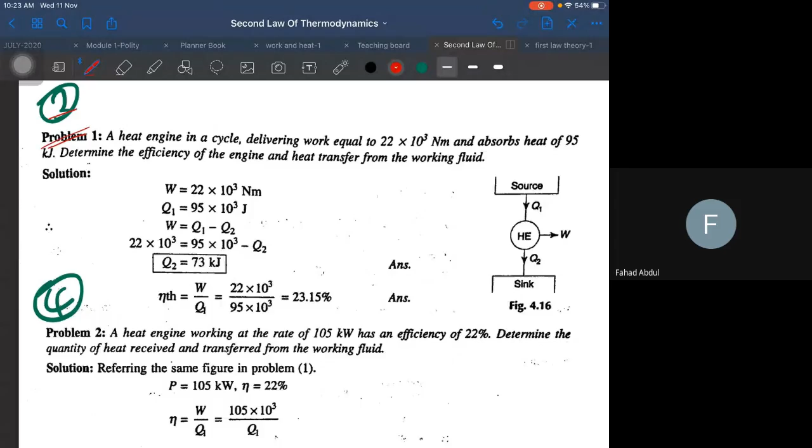Okay, so we shall start with second law of thermodynamics problems. We have solved a couple of them in the previous class. We'll try to look into some of them here also. So in this particular problem, which is the third problem I'm going to solve, a heat engine in a cycle - kindly concentrate, guys, concentrate in order to understand.

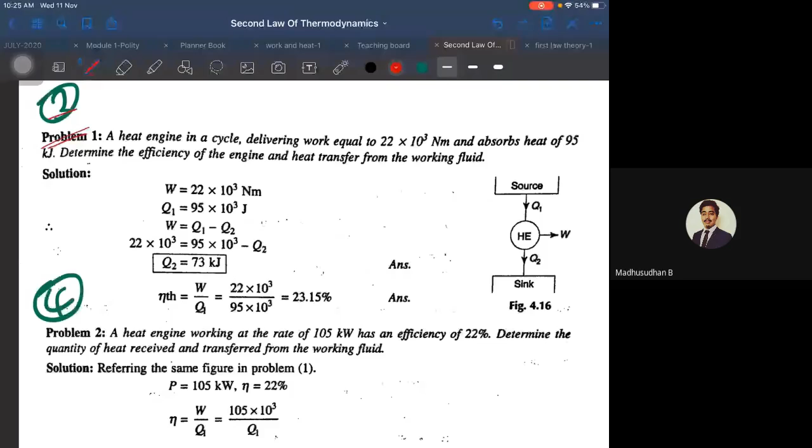So we were discussing a few problems. Third problem now, let us read the question. I may not be too interactive with you, but please do engage in the class. This is very important. Now understand the concepts, okay?

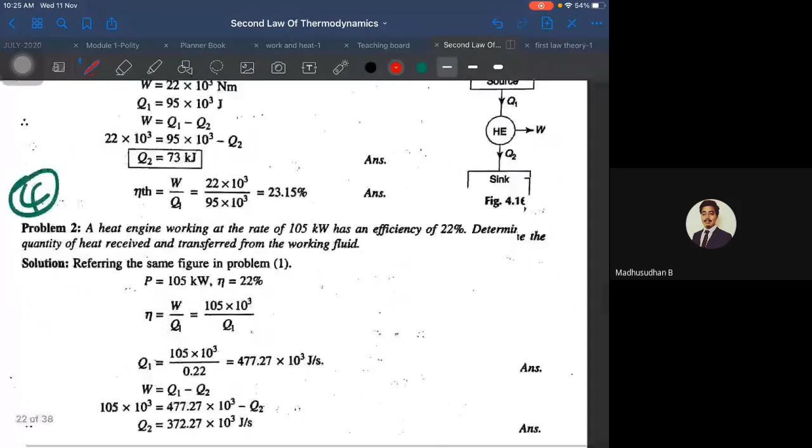A heat engine in a cycle delivers work equal to 22 into 10 to the power of 3 Newton meters. So I can write W equal to 22 into 10 to the power of 3 Newton meters, which is the work developed here. Next, it absorbs 95 kilojoules of heat.

With respect to sir, is it Q1 or Q2? It's a heat engine, so Q1. Q1 is given as 95 kilojoules of heat. Determine the efficiency of the heat engine.

So you have to find the heat transfer from the working fluid. As simple as that, okay.

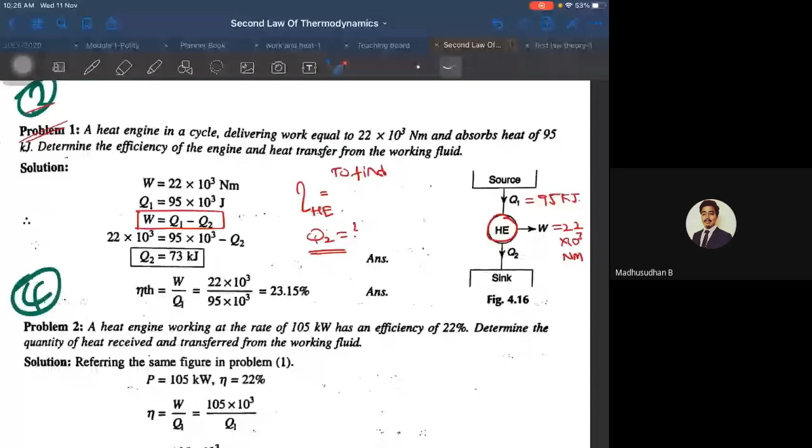So W is given by Q1 minus Q2. You know the value of W, and you know the value of Q1. You can calculate the value of Q2. So Q2 is equal to, as calculated, 73.

Now you have to calculate thermal efficiency. Thermal efficiency is the work output divided by the heat input, so W of the heat engine divided by Q1. Since W is given and Q1 is known, you can calculate thermal efficiency.

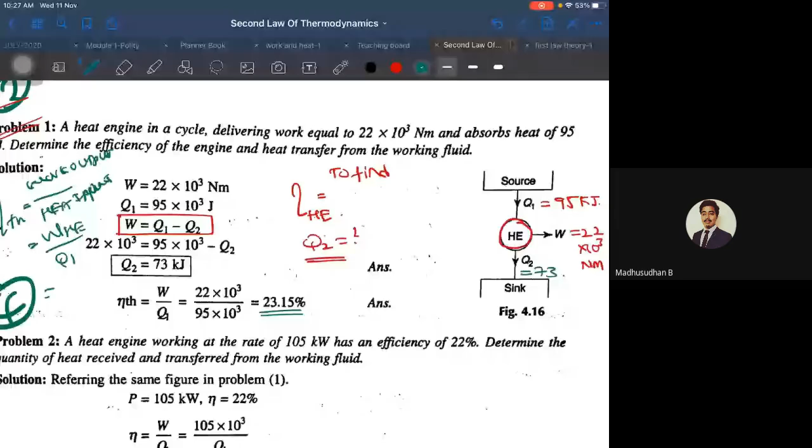So simple problem, any doubts in this? No, sir. Understood the problem? Yeah, okay, shall we move to the next one.

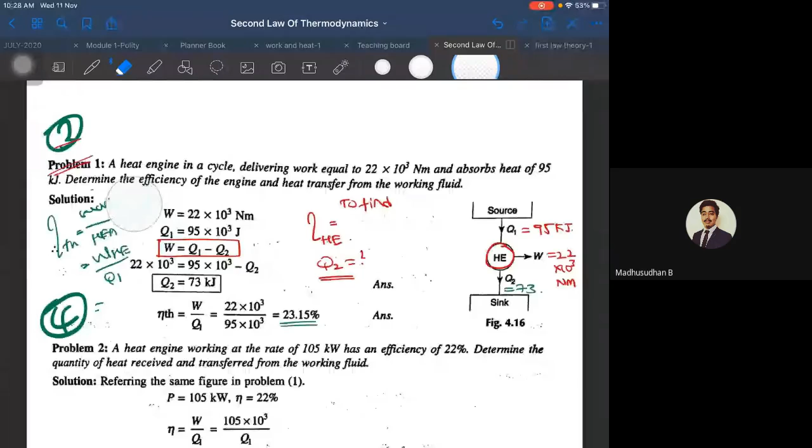A heat engine working at a rate of 105 kilowatt has an efficiency of 22%. Determine the quantity of heat received and transferred from the working fluid.

It is a heat engine, so first let me draw a heat engine. It receives heat from a temperature source, and there is a sink T2. So it receives Q1 amount of heat and ejects Q2 amount of heat. The difference between these two is given as the work output, that is Q1 minus Q2.

So what are the things given in this problem? Work output is given, which is 105 kilowatt, and efficiency is also given, which is 22%. You know that efficiency of a heat engine is the work output divided by the heat supplied.

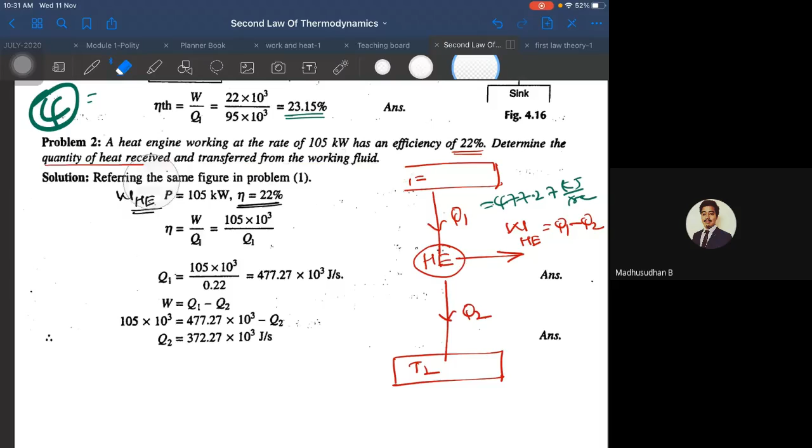Same thing, W equals Q1 minus Q2. W is known, Q1 is calculated, and you can calculate Q2. Thereby you get the quantity of heat received and transferred from the working fluid. Any doubts in this problem? No, sir. Kindly concentrate, and in the meantime, if you feel bored or stressed, just give me a sign.

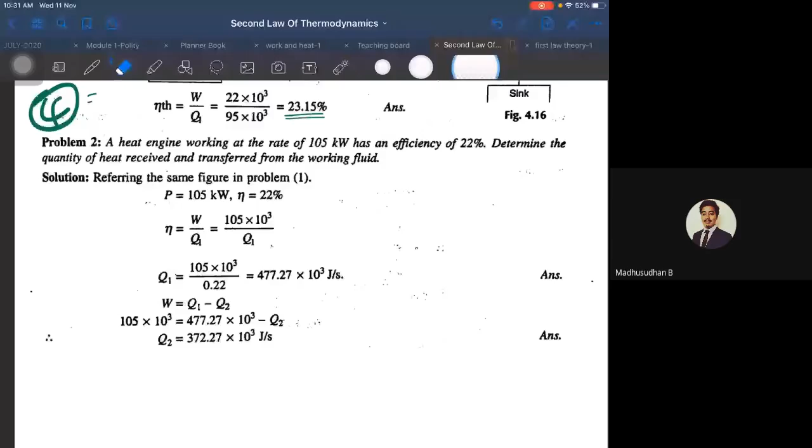Then start, everyone just listen. That's it, okay, the fifth problem, guys.

A reversed heat engine absorbs 220 kilojoules of heat from a lower temperature region and has a mechanical input of 90 kilojoules. Determine the quantity of heat transferred to a higher temperature region. Also determine the COP of the reversed engine when working as a refrigerator and as a heat pump.

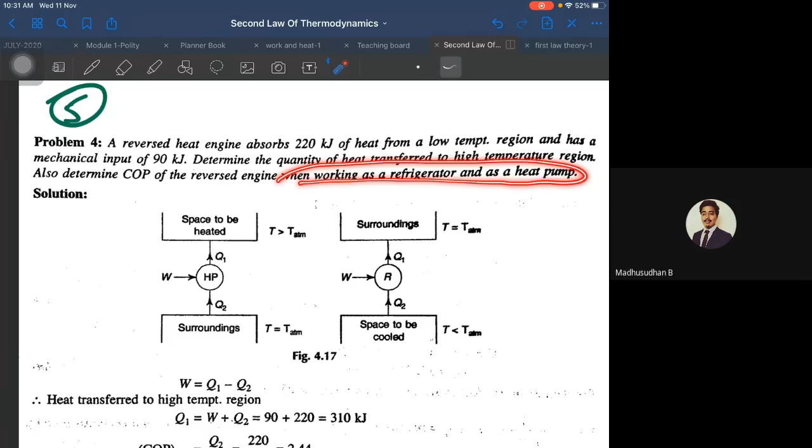This is a very good question. First, he talks about the heat engine. If a heat engine is reversed, what happens? It becomes a refrigerator. In the last few problems, the heat flow was in one direction, yes or no. Now in case of a heat pump or a refrigerator, the heat flow will be from the lower temperature region to a higher temperature region. In order to do so, I should work on the system according to the Clausius statement. Getting the things, guys?

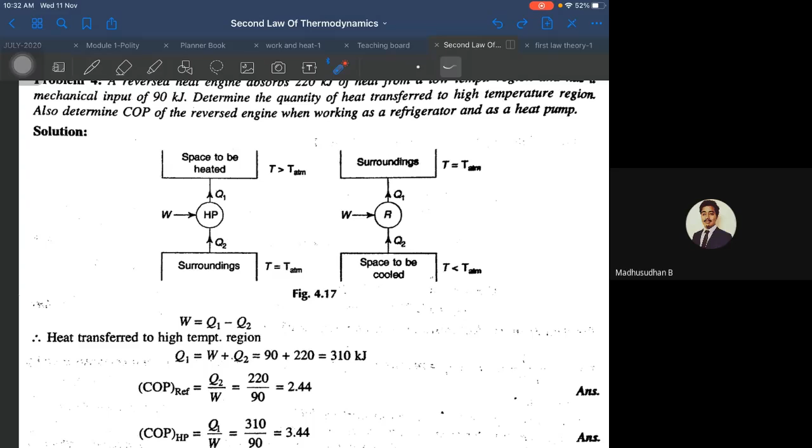Now, what he has given in the problem is the reversed heat engine. A reversed heat engine is nothing but a heat pump or a refrigerator. Keep this in mind. If you reverse a heat engine, it either becomes a heat pump or it becomes a refrigerator based on your intention. So he asked us to analyze it in both aspects. We shall do it.

The reversed heat engine absorbs 220 kilojoules of heat. So what is this 220 given as? It's the Q2 value. Excellent. So it is the value of Q2 which is given, which is 220, which is same for both cases. Now, from a lower temperature region, this is your lower temperature region, that is what you have known.

The region has a mechanical input of 90 kilojoules. So what is this parameter given? I think it is the value of W, is it? Yes, sir, the mechanical input is 90 kilojoules. Since the value of input and the value of Q2 are given, you can calculate the value of Q1 directly, where W is given by Q1 minus Q2. So Q1 is W plus Q2 here. Just add these two.

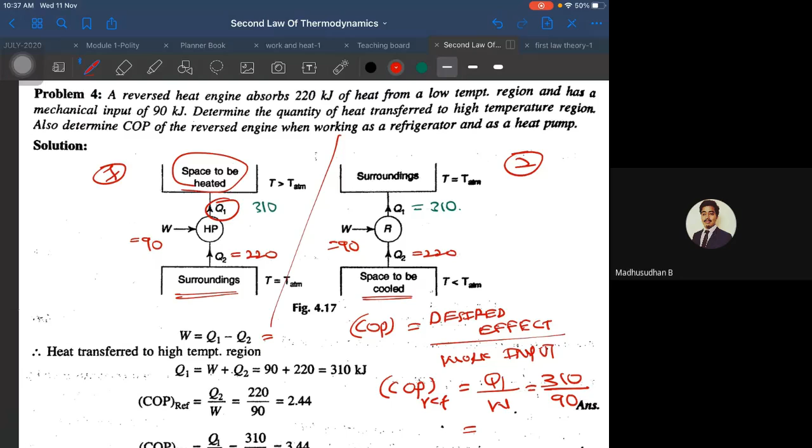So therefore, the COP of a refrigerator is equal to the desired effect divided by the work input value W. So thereby, desired effect is Q1. Yes, it's Q1, I've just overwritten it. So Q1 divided by W. Q1 is 310 divided by W which is 90. That is equal to 310 divided by 90 is what?

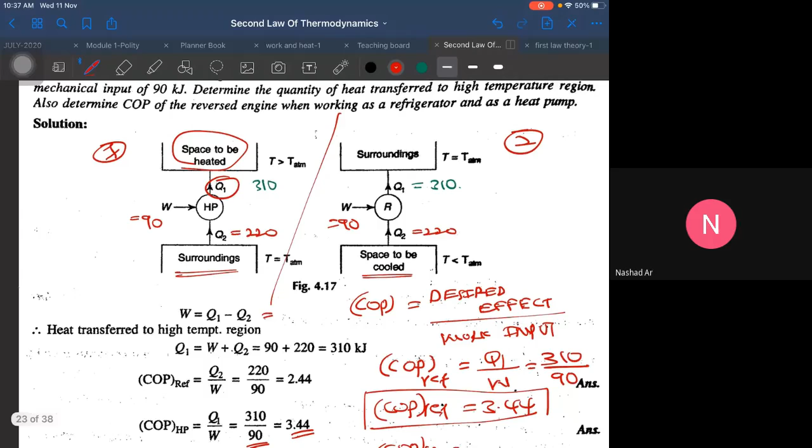3.44, so that is the COP of a refrigerator. Similarly, if you want to calculate the COP of a heat pump - I think I'm going wrong somewhere. So is it reversed? Yes, it is reversed. Just a minute, take care of all this.

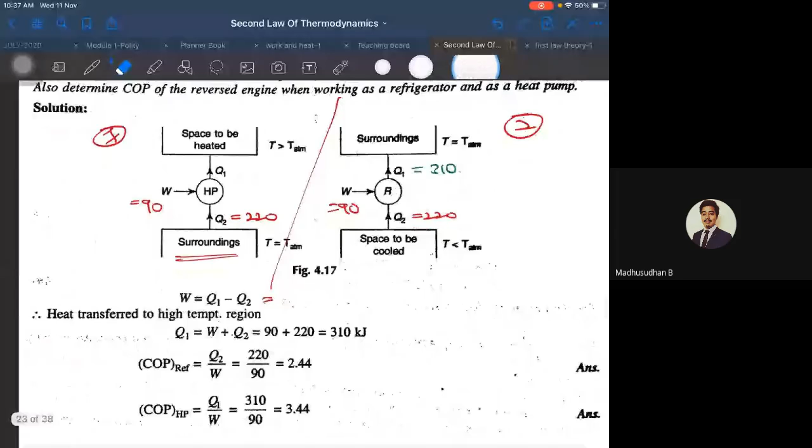It's correct. All the things are correct.

Let us try to analyze the refrigerator one.

For COP of a refrigerator, it is nothing but the desired effect divided by the work input.

Now, in this COP of a refrigerator, which is this, I was looking into heat pump initially, is it? I was looking into heat pump. That's why I was going wrong.

So COP of refrigerator, in the sense I have to look for the refrigerator here. In the refrigerator, what is my desired effect? Heating or cooling? Cooling, Q2.

So cooling is my desired effect. That's why I need to take the value of Q2 as my desired effect.

So that is Q2 divided by W. So what is the value of Q2? It's 220, divided by work input, which is 90.

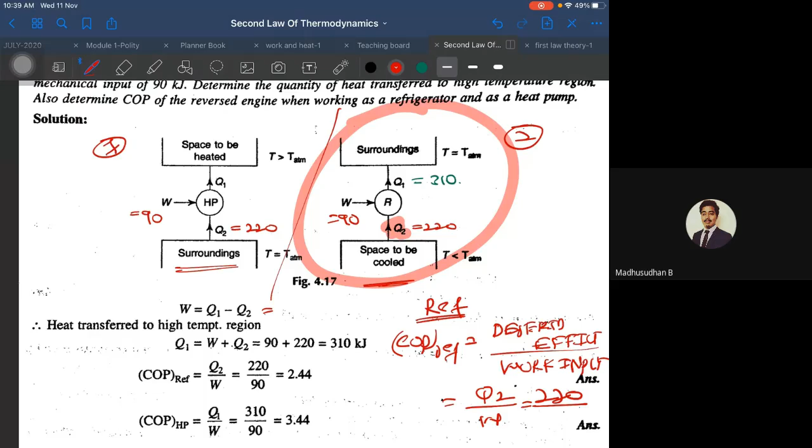So thereby, COP of a refrigerator is what? Whatever the value here is, it is 2.44.

Similarly, if I want to analyze the heat pump now, which is this particular thing here, the same thing.

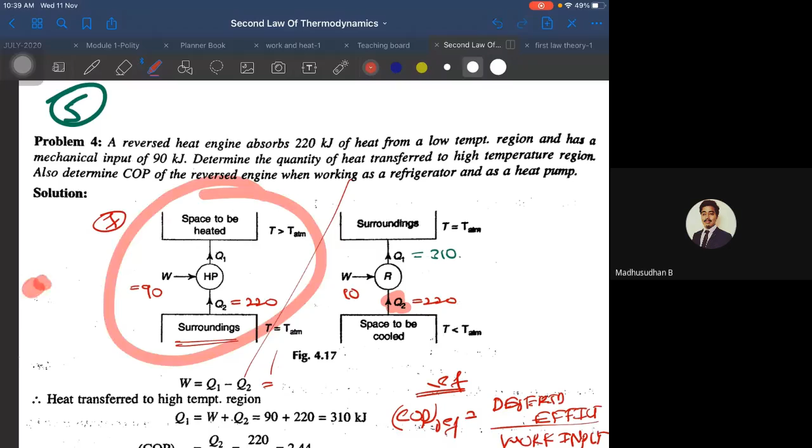The COP of a heat pump I must calculate, which is again desired effect divided by the work input. So in this case, in a heat pump, your desired effect could be what?

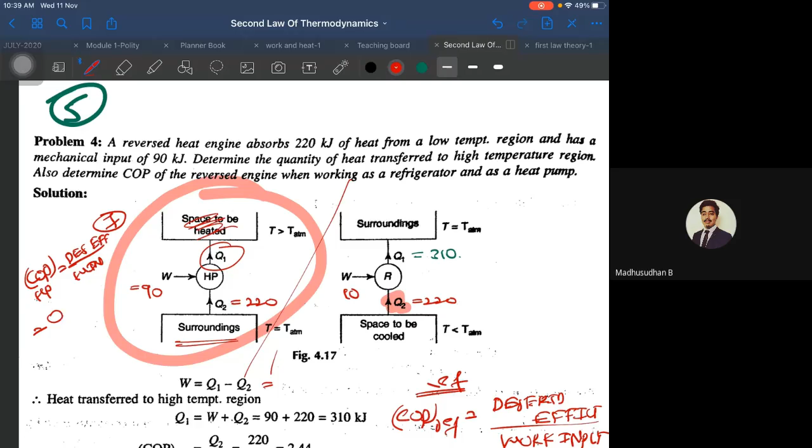Heating. So if you want heating, your desired effect is Q1 here. So it is Q1 divided by the work input, which is W.

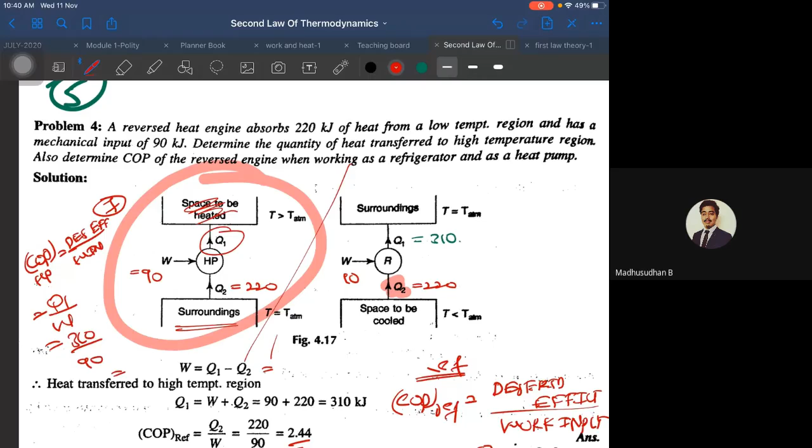That is, Q1 is how much? Q1 is 310 divided by work input, which is 90. So this value accounts to be 3.44. So COP of a heat pump is 3.44.

So if you observe these two values, we have derived an expression stating that COP of a heat pump equals 1 plus COP of a refrigerator. Yes or no?

We have derived this, yes sir. So that particular thing satisfies for this also. So 2.44 plus 1 is 3.44.

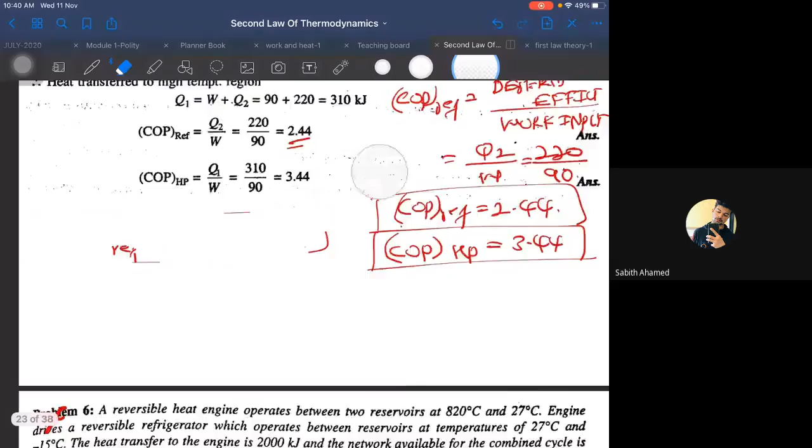Any doubts in this particular problem? No problem, sir. Clear? Yes. Okay.

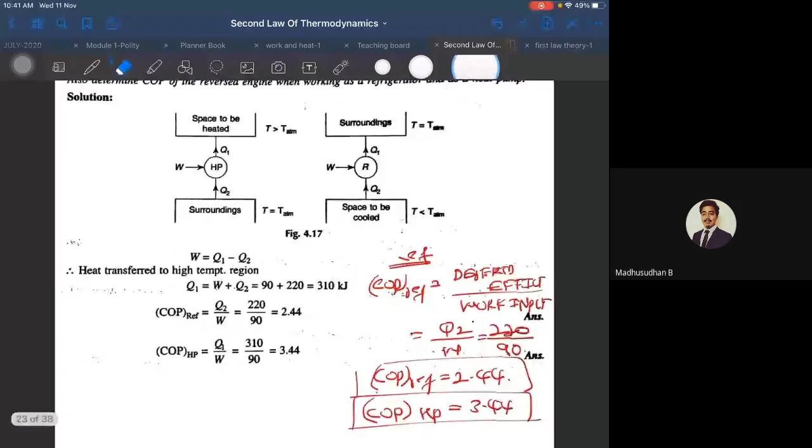Now let us move to the next one. This problem is not required for you because it's complex. I will just, if you are interested, share the gist of it. This is a beautiful problem where you will try to analyze.

So in this particular problem, what happens is your heat engine, your heat engine, will develop a certain amount of work, is it?

That is why your heat engine is designed for. Your heat engine will develop a certain amount of work, and your refrigerator needs some amount of work acted on it so that your refrigerator works.

What if I combine these two like this? If I combine these two, that means whatever work output you're getting from the heat engine, if I just use the same work output to run a refrigerator, and how to analyze such systems is the beauty of this problem.

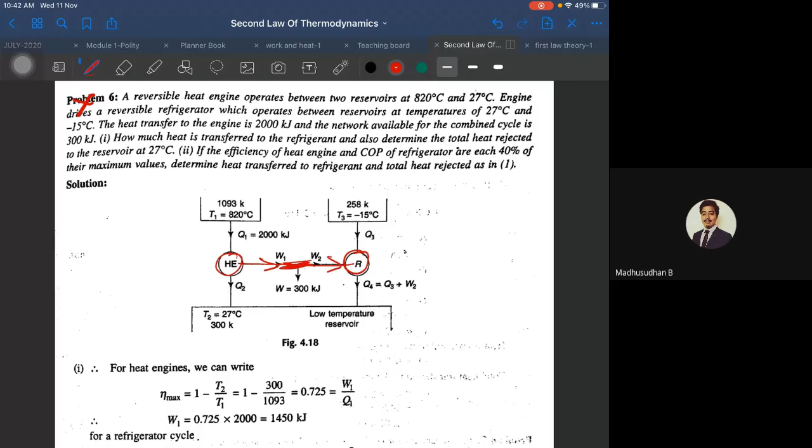It's very good, but not required for you guys. Okay.

Now, problem number 7. In the reversed heat engine, the work done on the engine is 75. So reversed heat engine in the sense it could be a heat pump, or it could be a refrigerator.

I think it has the same thing as previously, but a little bit of parameters might be shuffled.

Reversed heat engine, this is the heat engine, and the work done is how much? 225 or 75? It's 75. Now, heat transfer from the lower temperature region to the engine is 225.

So Q2 value is 225 from a lower temperature region. Determine the heat transfer to a higher temperature region, which is Q1, is questioned, and the coefficient of performance as a refrigerator and as a heat pump.

I think it is very much similar to the previous problem, is that? Are you able to find any difference from the previous problem for this particular problem here?

No sir, it's exactly similar, I guess. Yes.

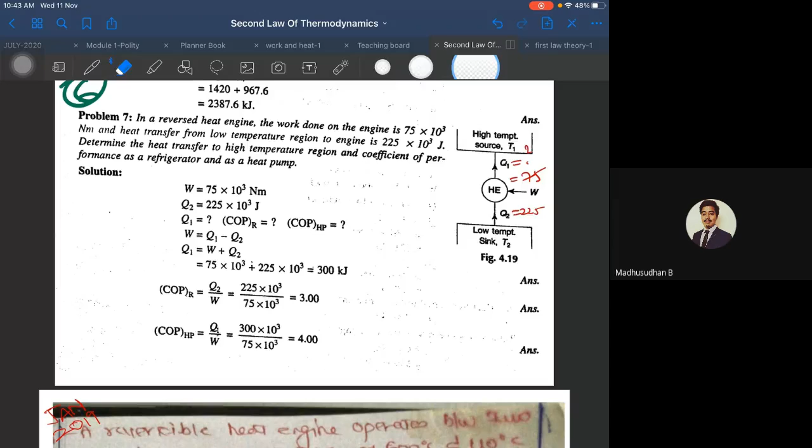Let us move to the next one. All these concepts are not required. Which are not required, I have just marked them. Okay, this is also not required.

Yes, this is a good problem, we should try to solve this again. Now look here: when 50 kilowatt of power is supplied to a heat pump, he has given...

Okay, so 50 kilowatt of power is supplied to a heat pump, he says. That means he has given the value of work input to a heat pump.

Its coefficient of performance is 5. Excellent, so he has given the COP of the heat pump as 5.

Fine, determine the rate of heat transfers to and from the working fluid.

Here the rate of heat transfers to and from, both you have to find. That means you have to find what is the value of Q1, and even you have to find what is the value of Q2. So that is the question given.

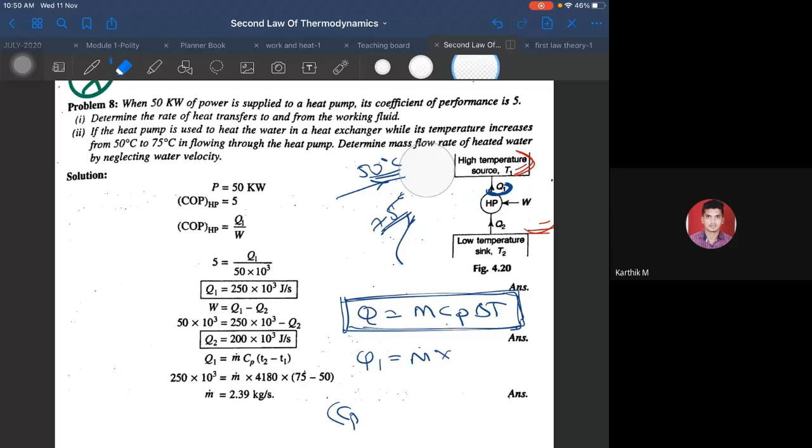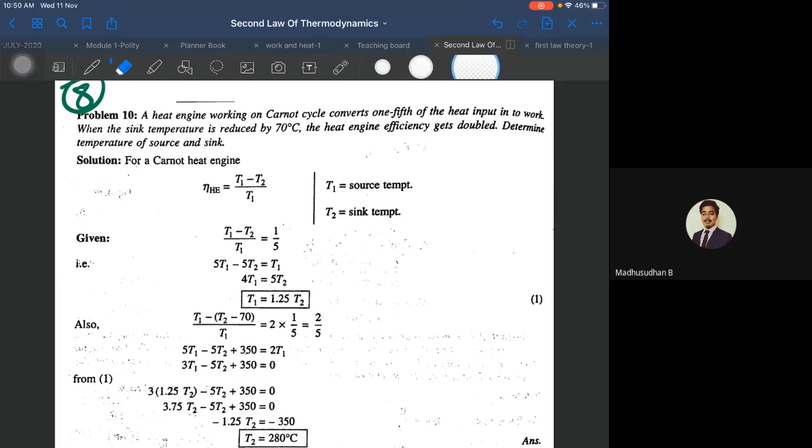This is required, okay you can try this. This is again the same thing where you need to find the values of T1 and T2. Some constraints should be given, and according to that you have to find the value of T1 and T2. This will be provided to you in the form of notes.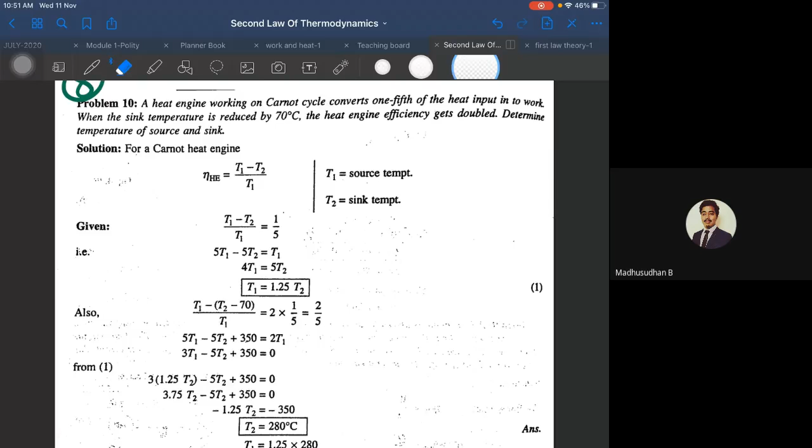I thought of giving this as an assignment, but there's no time for that. So just try this, and if you face any difficulty let me know. There is a last concept which is this thing. Just concentrate on the concept, don't go with the derivation. It is a huge derivation, not required for you guys. Just concentrate on the concept.

...intermediate thermal reservoir. So this is the intermediate thermal reservoir, which acts as a source for engine number 2, but it acts as a sink for engine number 1. So that is known as the intermediate thermal reservoir.

There are certain conditions, guys. What if this particular engine E1 and engine E2 both give the same work output? Then what will be this temperature? This is the first question: if engine 1 and engine 2 both gave the same work output, then what will be the value of T2?

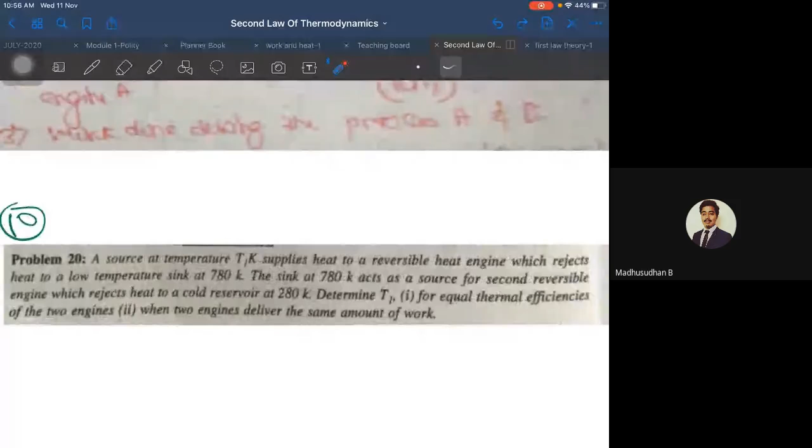A source at temperature T1 K supplies heat to a reversible heat engine which rejects heat to a low temperature sink at 780 K. This sink at 780 K acts as a source for a second reversible engine which rejects heat to a cold reservoir at 280 K. Determine T1 for two conditions: first, for equal thermal efficiency of the two engines, and second, when the two engines deliver the same amount of work. Any difficulty in solving this after knowing the concepts?

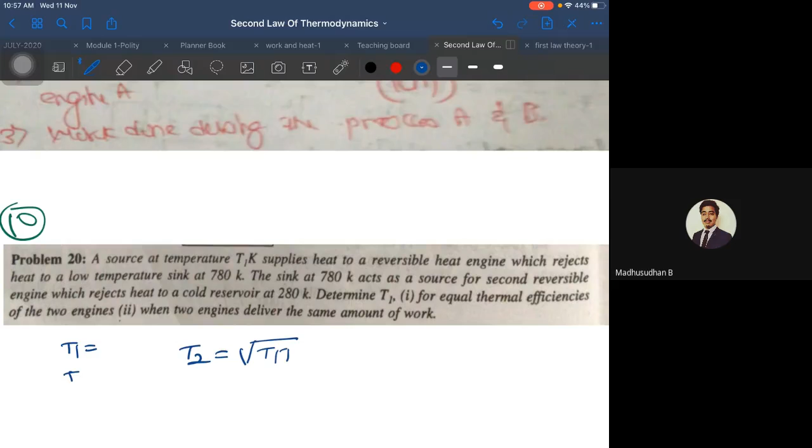I want answers from everyone. Any difficulty in solving this? It's just for the same efficiency, T2 would be equal to the square root of T1 and T3. And for the same work output, T2 will be the arithmetic mean, that is T1 plus T3 divided by 2. Based on these two equations, he has given the value of T2 and T3. You must calculate the value of T1. So there are two equations, one unknown, easily solved using mathematics.

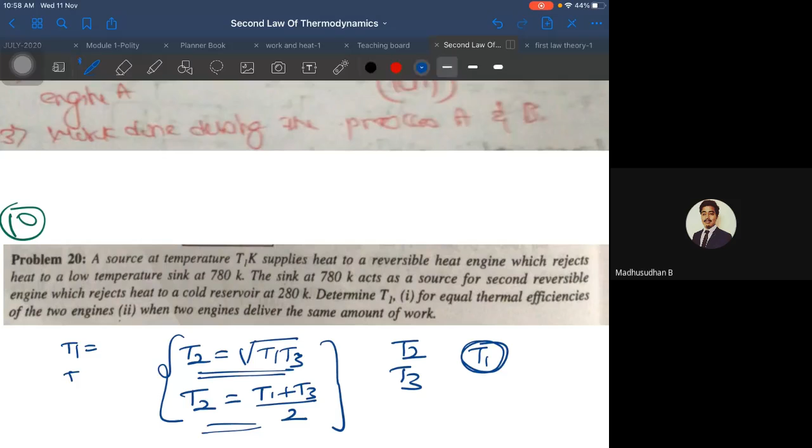But it can be asked for 6 marks for you without any derivation. I have seen your question papers, nowhere has it asked for derivation. So T1 is given, T3 is given, and if both engines have the same efficiency, find the intermediate temperature. T2 equals T1 plus T3 divided by 2, for the same work output. And T2 equals square root of T1 and T3, for the same efficiency. Use these two equations to get the value of T2, thereby you'll get the answer.

Any doubts, guys? Were all the problems clear, or was I going too fast? So here it ends the second law of thermodynamics and module number 2, the concepts of basic thermodynamics. From the next class, we'll be starting newer concepts, a totally different topic about heat transfer, about convection and radiation. That is very, very interesting. We shall start it from the next class. Okay, so first give your attendance.